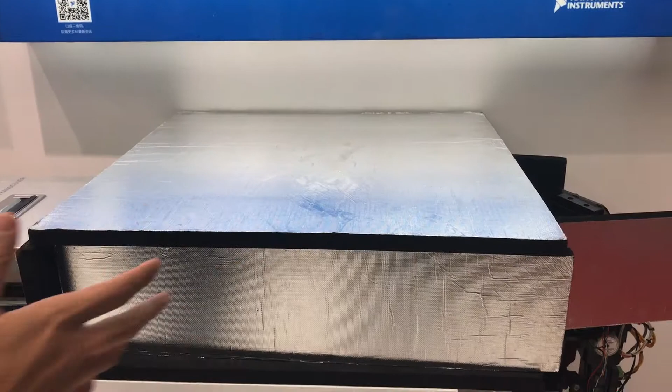I'm a systems engineer at NI Yerevan, and I would like to present you the 77 GHz vehicle radar test system from National Instruments. Let's start from the system setup first. Here we have the radar sensor. The red dot that you see blinking on the sensor comes from the laser rangefinder for proper EIRP power measurements.

As you can see, the sensor is currently mounted on the rotating table that can do both horizontal and vertical rotations for azimuth and elevation. And here we have a rudimentary anechoic chamber that we use for these measurements.

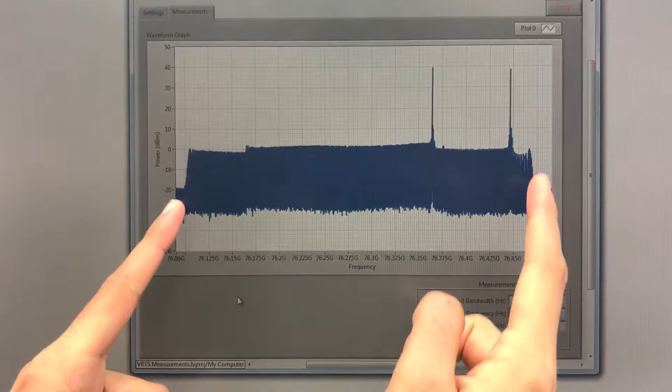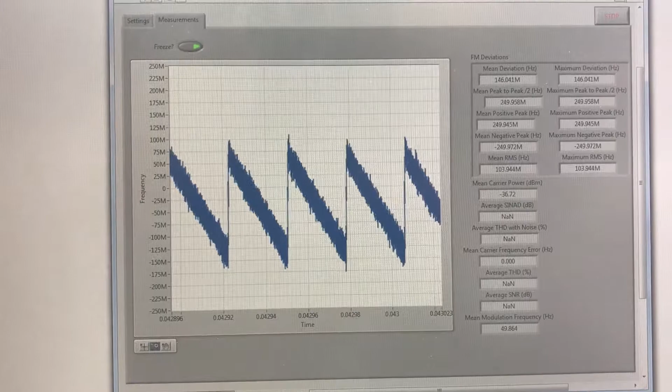This is the system itself, consisting of two parts: the millimeter wave transceiver for 77 GHz, as well as the baseband part with the VST inside of it. The same set of hardware can be used for both signal analysis and for target generation. Let's jump into the signal analysis portion first.

The first example that I'm going to show you is the antenna radiation pattern measurement. Here you can see the horizontal beam of this particular sensor and the vertical beam. This is the power measurement of this sensor, and we can see that the EIRP is around 40 dBm. And this is the occupied bandwidth measurement.

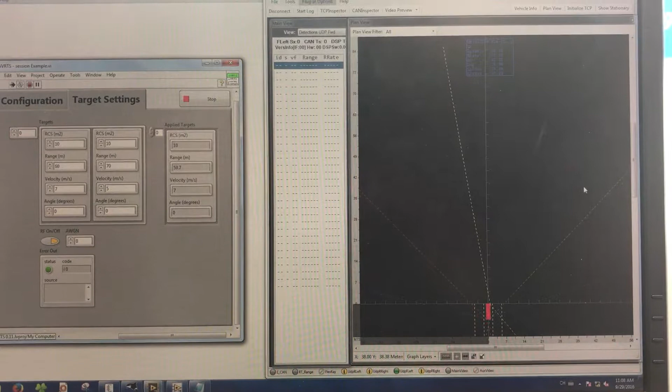From the spectrum, we can see that this sensor transmits three different types of signal. One is the large deviation FMCW chirp. There is another small deviation FMCW chirp, and there are two CW tones inside the signal. For further analysis, we can demodulate the signal, analyze the chirps, and measure the chirp period, deviation, as well as the chirp linearity.

Now let's go into the target simulation capability of our system. This software is provided by the sensor manufacturer. Now I will introduce two targets, one at 50 meters and another at 70 meters. You will be able to see two targets on this interface, and these numbers will show the 50 meter and 70 meter targets on the sensor measurements.

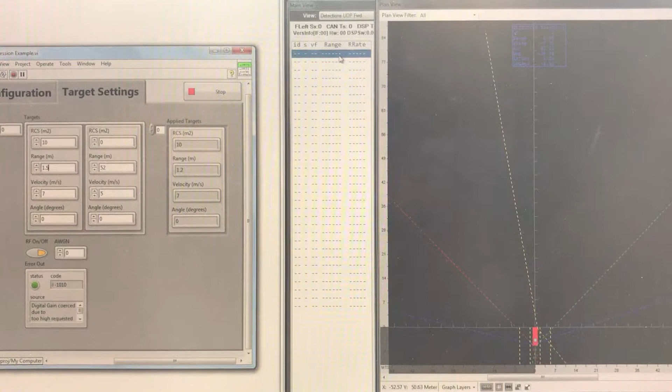These are two fully independent targets in terms of radar cross-section, range, and velocity. Now I can move the first target closer to the second one, and you can observe how the target moves on the plan view. And I can move the second target closer to the first one and bypass it.

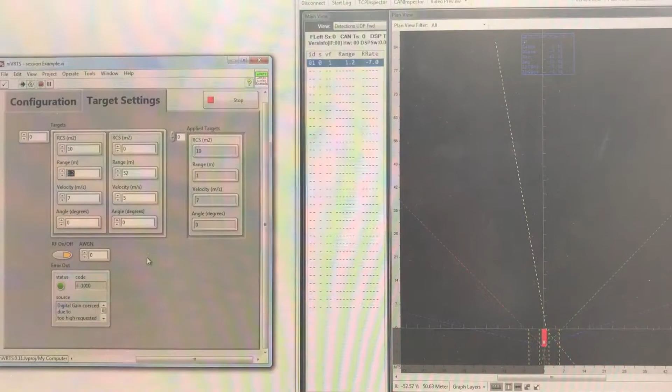Finally, I want to show you the close-in capability of our target simulation system. I will introduce a target at 5 meters. We can see the 5 meter target on the display. I will start decreasing the range by 1 meter. Now it's 4 meters, 3 meters, and 2 meters.

Also, our system has a range resolution of 0.1 meters. So I can simulate 1.9 meters, 1.8, 1.7, 1.6, 1.5, 1.4, 1.3, and 1.2 meter targets. So the range for this system is from 1 meter to 250 meters and above, with a resolution step of 0.1 meter.